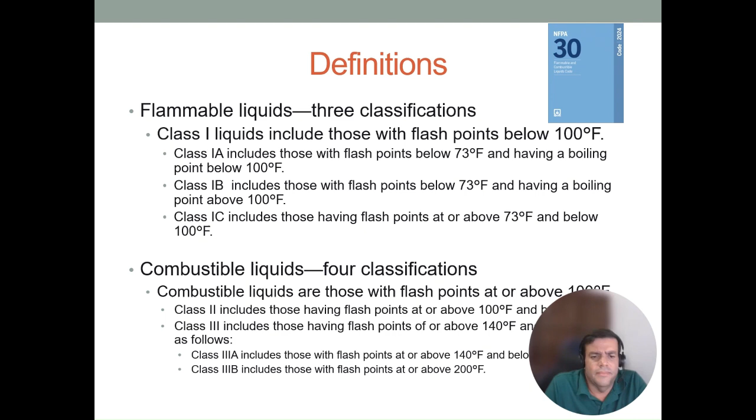The combustible liquids have their own classification. Class II includes flash points above 100 Fahrenheit. Class III above 140 Fahrenheit. We have Class IIIA and Class IIIB. This is the division of the flammable and combustible liquids according to several temperatures and boiling points. Okay.

Another important definition is the auto ignition temperature. This is the minimum temperature at which a flammable gas-air or vapor-air mixture ignites from a heat source without the presence of an open spark or flame. So it doesn't need an open spark or flame to start this ignition.

Okay, flammable limits: the minimum concentration below which propagation of the flame does not occur is the lower flammable limit, the LFL, and the maximum proportion of vapor is the upper flammable limit, the UFL. The flammable range is between these flammable limits.

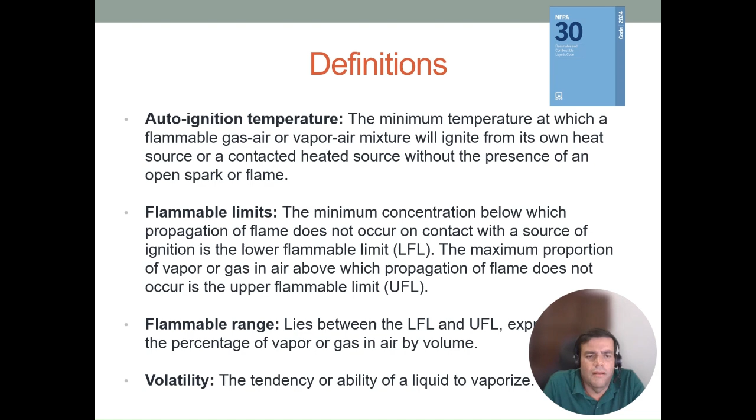We can see, for example, the flammable range for gasoline and air. It burns when we have a concentration from 1.4% to 7.6%. Lower, you don't have burning. Over, you don't have burning. In the case of hydrogen, for example, it is 4% to 75%.

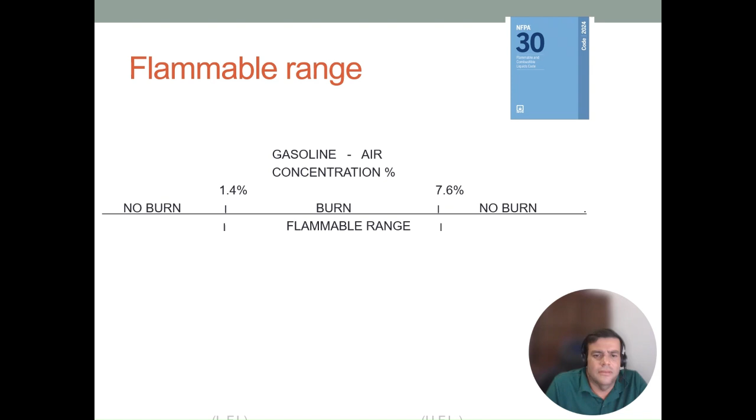The flash point is the minimum temperature at which the liquid gives off vapor concentrated enough to form an ignitable mixture, determined by appropriate testing procedure and apparatus.

Okay, oxygen deficiency is atmospheres having less than the percentage of oxygen found in normal air. The limits for an explosion to occur are the limits of vapor concentration where you have an explosive mixture or atmosphere.

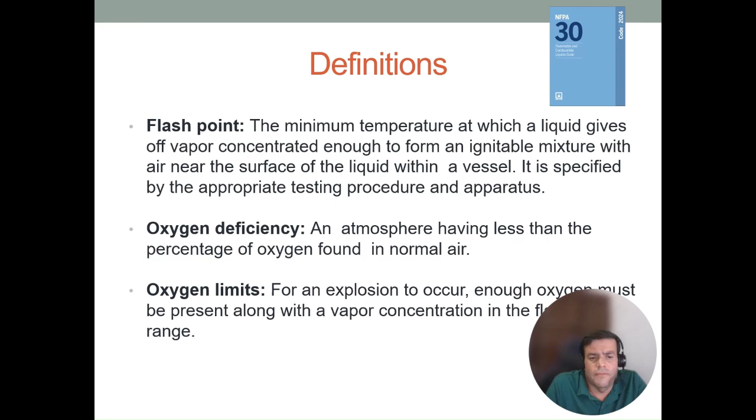Okay, propagation of flame is the spread of the flame through the entire volume of the flammable vapor-air mixture from a single source of ignition. The rate of diffusion is the tendency of a gas or vapor to disperse into or mix with another gas or vapor, including air. And the vapor pressure is the pressure exerted by a volatile liquid under any equilibrium condition.

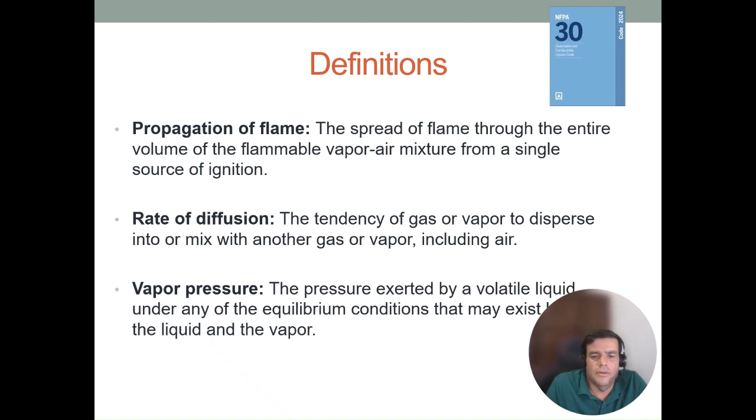So regulations: all storing, handling, and using of flammable and combustible liquids requires safe practice. You have national, international, and local codes, like NFPA, DOT, OSHA, for example.

Okay, the installation and maintenance of bulk storage. All aspects of the tanks conform to NFPA 30A. This is a Class I underground tank. Normally we need vents per NFPA 30, for example. And they should also be higher than the fill pipe opening and not less than 12 feet above the adjacent ground level. Okay, dikes: you have these kinds of walls to try to control any leaks of the flammable or combustible liquids.

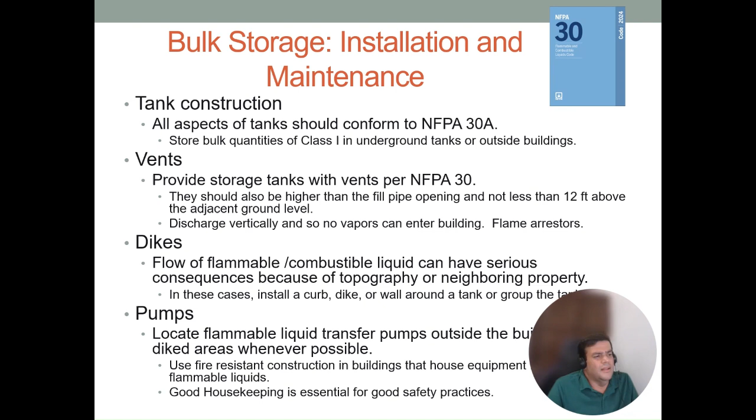Sometimes we have pumps that do the transfer from one tank to, for example, the engines. Spill control for bulk storage: we use curbs, walls, or dikes. This is a structure that has the capacity of the single largest container.

Then we have tank fires and their control. Normally for these fires, we need to use deluge systems according to NFPA 15 and foam chambers according to NFPA 11. Spill control, okay. Drain control, dike control. For example, how we can use this kind of dike, the minimum distance between the tank and the dike, the minimum height of the dike.

Cleaning tanks, okay, we have general safety rules, the confined space procedure and appropriate training. Protective equipment: all the workers need special wear when they are working with these kinds of liquids. And proper procedures, okay, you need to have safety procedures to do all the work in the tanks and in the pipes, for example.

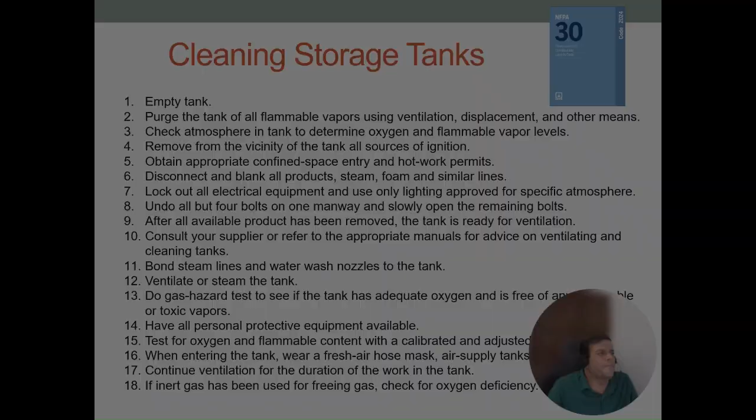Cleaning storage tanks, this is a guide. Empty the tank, check the atmosphere in the tank, remove ignition sources from the vicinity of the tank. This is a list to be followed step by step for the safety of the person and the equipment. Abandoned tanks: the authority may require removal of the tank. Sometimes we need to check permits according to the EPA, for example.

So this is NFPA 30, the Flammable and Combustible Liquids Code.